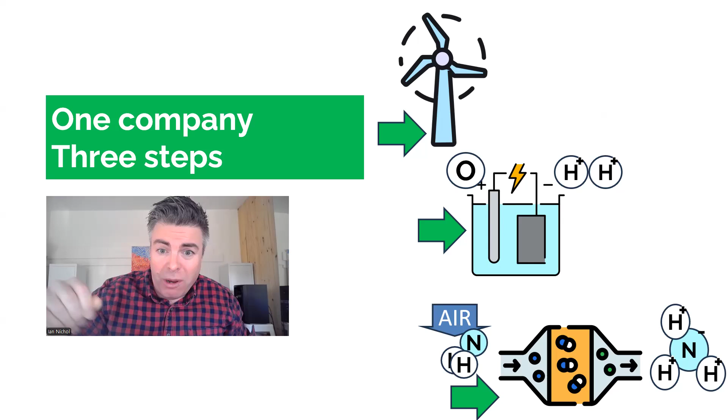You get a turbine, some electrolyzers. We know how to make hydrogen with green power. But instead of leaving it as hydrogen and trying to compress it and move it around as gas, you combine it with air, and then you have ammonia. That simple. You can buy a unit that works. It comes in a shipping container. That's it, just a shipping container. It's automated. You connect it to some green power, and it just makes ammonia.

Now, to do this at a massive scale, you need things like financing and contracts and insurance and maintenance. And believe it or not, that's all done. We know how to finance wind farms. No problem. Hydrogen production. No problem. Ammonia production, we've done it for more than 100 years. The distribution, there's pipelines, ships, trucks, tanks, anything you would want. The last step is the only missing step. That is using it as fuel. We've got the fuel, just need to put it in an engine.

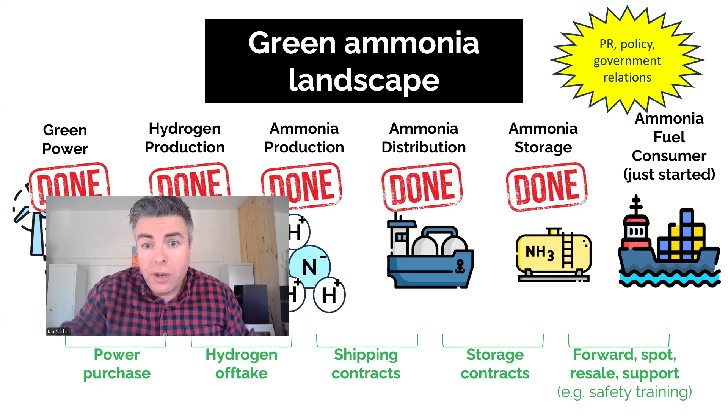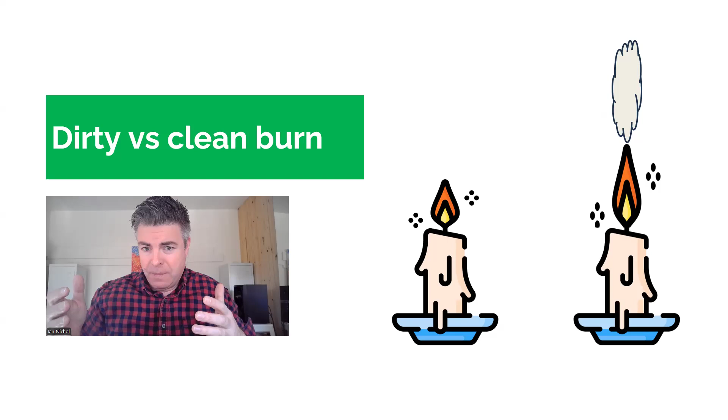Now, the combustion should be this simple. You take the ammonia, you burn it, you get air and water. That's what should happen. But I mean, everyone has burned a candle where the wick was a little bit too long. You can see the smoke. You can have a dirty burn and a clean burn. And the chemistry for dirty and clean, it's science, right? Engineers and scientists need to figure it out. And we haven't been using ammonia as fuel. So we have some research on it. Maybe it's not perfect yet. Because, I mean, a Formula One team has a couple thousand engineers. Around the world, there's 100 people working on this, maybe.

But you start with ammonia, and then there's all these different steps, and it's kind of like an energy ladder. It's giving off energy as it goes down, but if it's too hot, too cold, too much pressure, not enough pressure, too much oxygen, instead of getting 100% nitrogen, you can get 99%. So these other things you can get, N2O, NO, NO2, it's laughing gas and NOx, they call it. They're bad. We don't want them.

Here's some data from cars and trucks. All right. So the air, like I said, it's 78% nitrogen. So when you combust something, most of your tailpipe is nitrogen. But then the oxygen combines with the hydrocarbons to get about 140,000 parts per million, so about 14% carbon dioxide. Okay. Greenhouse gas. So no matter what you're burning, you kind of get that. But then, because the air is 78% nitrogen, even when you're burning gasoline or diesel, you can get that nitrogen to combine too. Right? So you can get a little bit of N2O, a little bit of NOx, but these gases are really powerful greenhouse gases.

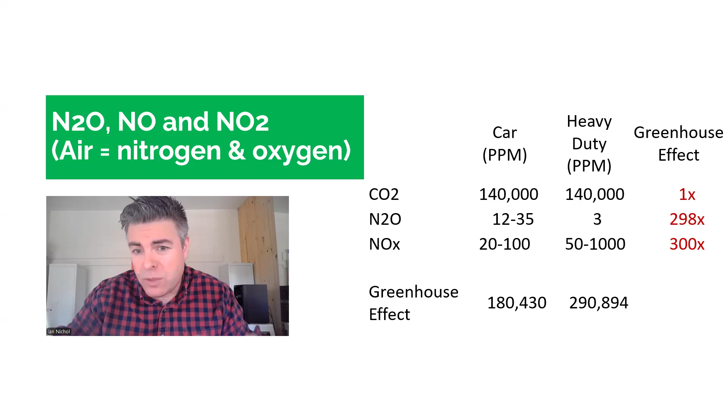So how do we design engines to be happy? This is another graph. It's some different research. It shows gradient lines. But I colored in this little green line. If you're in here, you're happy. You're green, no problem. And your engine runs like normal, kicks off the right amount of energy, right?

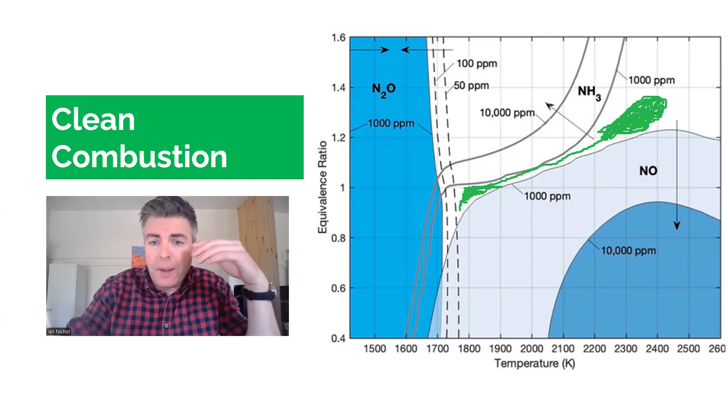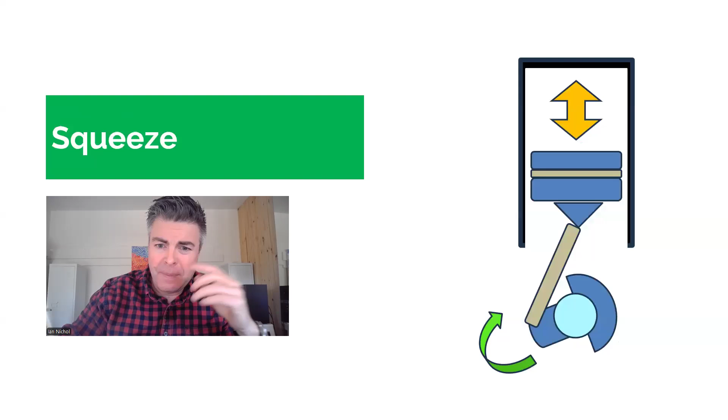So I'm going to take you through the 4 steps of a 4-stroke engine, right? You suck in air, and in this case, you'd suck in ammonia as well. You squeeze it, and squeezing it puts heat into it. You have a spark, which combusts it and starts it burning. And as it burns, it pushes the piston down, and then it swings back up and exhausts, right?

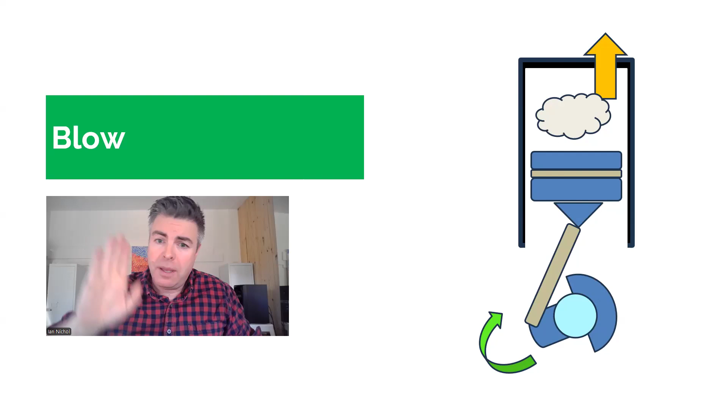So as we suck in, we have fuel injectors, and we can control very precisely the amount of air and fuel. So we want it to be exactly this, and we can do that. The technology for that has existed for cars for quite a while. And we can also do things with the intake air temperature. For example, anything that's supercharged or turbocharged, they have intercoolers on the air that comes in. You can tweak those. You have temperatures on them, and you can decide what you want to do with them.

You can also, as you design your cylinder itself, design it to retain more heat or less heat. So diesel engines, the cylinder itself is quite a bit warmer than a gasoline engine, just the walls, right? So this is all stuff. It's got to be done to a degree, but we know how to do this.

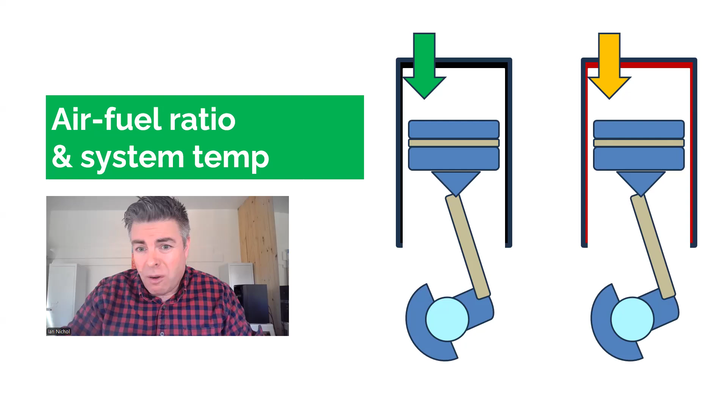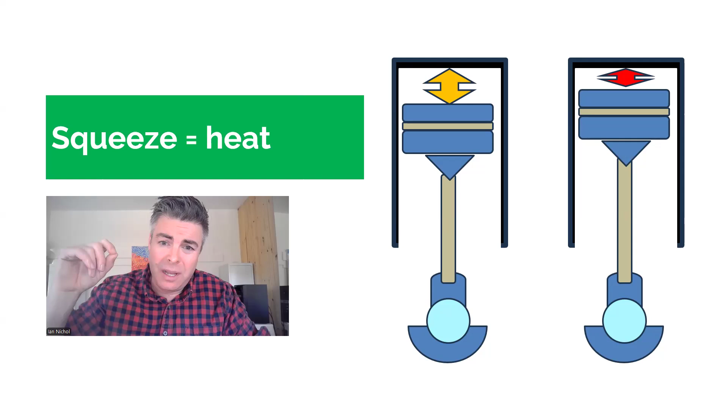When you squeeze it, the length of that linkage right there determines, are you going to compress it 10 to 1, which is sort of typical for gasoline, maybe 8 to 1 for gasoline, or 20 to 1 for diesel. So as you compress it, you're creating a different amount of heat. And it's a choice. We know how to do it. We can experiment. The labs have adjustable compression ratio setups so they can test all this stuff.

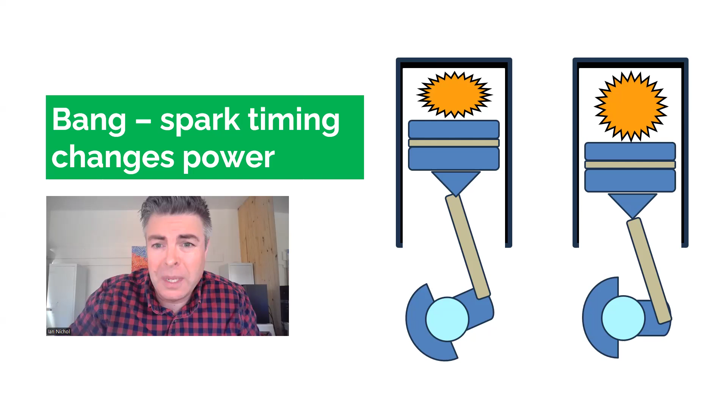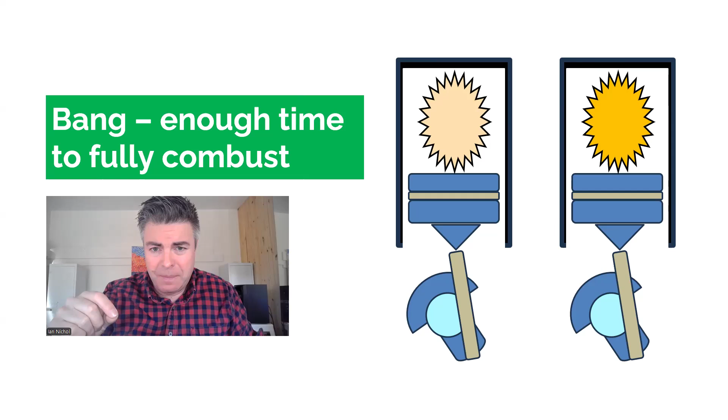And then the amount of spark you put in and when you put that spark in is going to change how it burns, the temperature it burns, the rate it burns, and the torque. Because it's a lever, if you do it at a different point, it has more or less rotational torque. And then finally, with that timing, ammonia burns slower than gasoline or diesel. So if you're modifying those engines, you want to make sure that there's enough time in that combustion stroke to fully combust.

But I mean, it works, and people have figured out how to keep it happy. There's a big wide zone where there's enough time for it to burn, where engines exist that do this already, set up like this off the shelf. You modify them, make sure the injector is big enough to flow 3 times as much, because it's 12 versus 36 megajoules per liter.

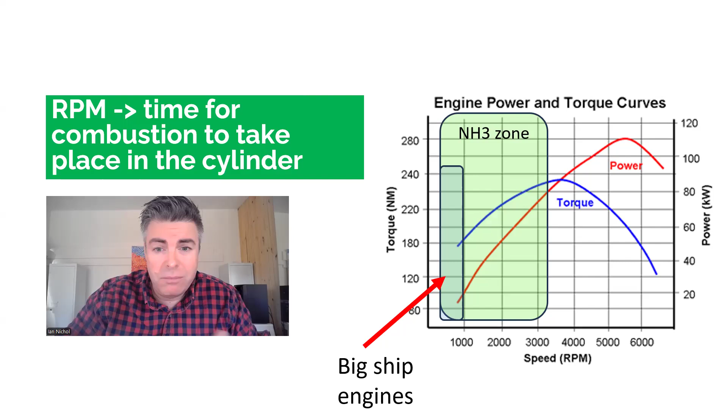The first application where people are really using a lot of this, there's 12, 15 big ships out in the ocean running on green ammonia as fuel. Those ships have really huge chambers, and they lug along really slowly, which gives plenty of time in that combustion chamber to burn, right? So it's not going to be an F1 car with zero emissions, but if you want a Dodge Ram with zero emissions, no problem. You want a towboat, 100% green? Sure. That's pretty good news, right?

So I want to do a shout out to Seamus. Has a PhD in engines, done a bunch of testing on this, and is commercializing some of this with Aza Power. So yeah, you want a 100% green truck, Mack truck or personal truck or whatever. The science is done. I mean, it's not just possible. It's done.

So in summary, 100% green inputs scales insanely fast, no problem. The bad things you can get from incomplete burns, yeah, they're bad. But then you design your combustion around that. You make sure you have the right air fuel mix. You make sure of your gas temp, by varying how stuff is fed in and the compression of it. You change your ignition timing, and you've got a green engine, right? Yay! Okay.